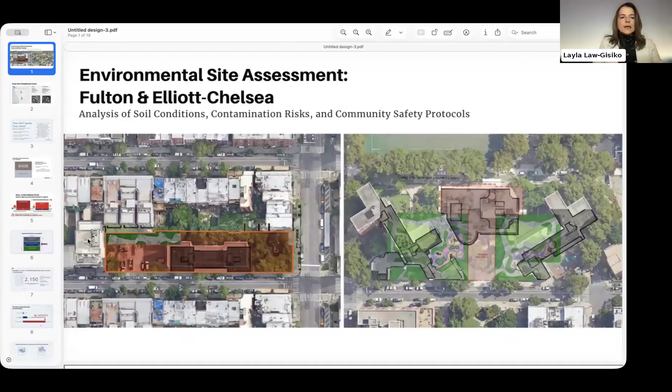Okay. So just to situate the audience, for Fulton, the first building that is slated for demolition is located on 19th Street at the corner of 9th Avenue, while for the Elliott-Chelsea campus, the Chelsea Addition building is the first building slated for demolition, and it is on West 27th Street between 9th Avenue and 10th Avenue.

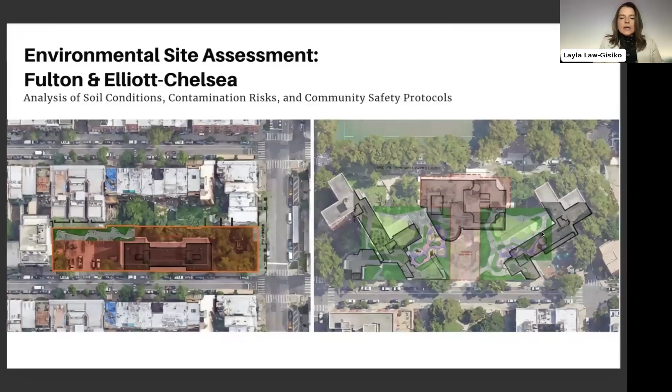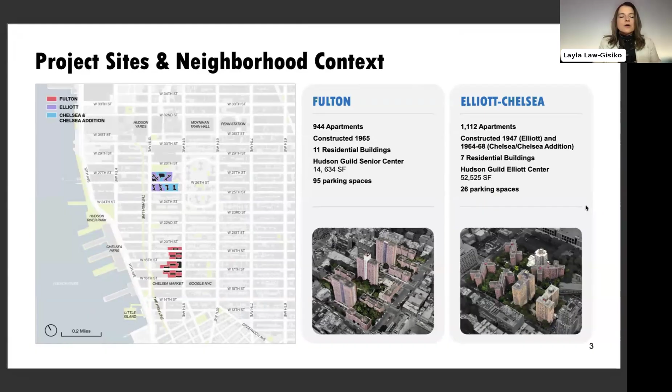You can see on the map the full campuses going from 16th Street to 19th Street and bounded by 9th Avenue for Fulton, and from 25th to 27th Street from 9th to 10th Avenue for Elliott-Chelsea. Under the plan as it is proposed, it would see the demolition of all 24 buildings, 18 residential buildings, and it would see the reconstruction of much larger structures.

So the soil quality was basically assessed, and the developer, in conjunction with NYCHA, didn't guess, they tested. This was part of the requirement for the environmental study that needs to be performed in order for this project to receive all the approvals. What it did is a geophysical survey and direct push soil borings, which means that they basically inserted with pressure some canisters inside the soil and captured samples.

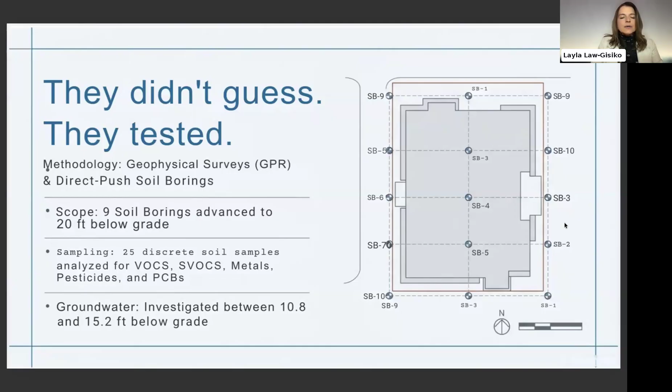There were nine soil borings, and they advanced to 20 feet below grade. The sampling was then analyzed for a number of contaminants, including heavy metals and vapors. The groundwater was also investigated between 10.8 and 15.2 feet below grade.

So what they found is that the immediate subsurface between 0 and 12 feet is actually non-native fill, also known as urban land. It is basically a composite of sand, silt, gravel, brick, and ash. This comes from the time when the existing buildings were constructed, and they basically took any material that they came across, and we'll see that there was a lot of stuff there, including existing buildings, but also gas stations and factories. All this material was basically crushed, and it is on that material that they built the existing buildings. Below 12 feet, you hit the native soil and the bedrock.

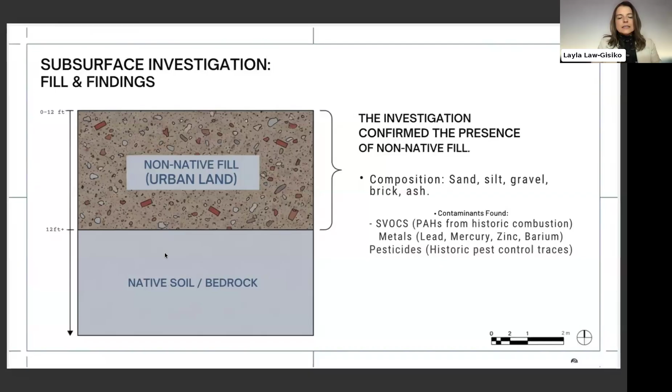What the report found is that there is soil contamination, heavy metals that exceed the safety limit, specifically for lead. At Elliott-Chelsea, it reaches 2,680 milligrams, where the limit should be 400. And at Fulton, it reaches 2,180, same limit. Additionally, toxic metals at Elliott-Chelsea in exceedance of what is deemed acceptable include cadmium, copper, and manganese. And barium and mercury also exceed the safety thresholds.

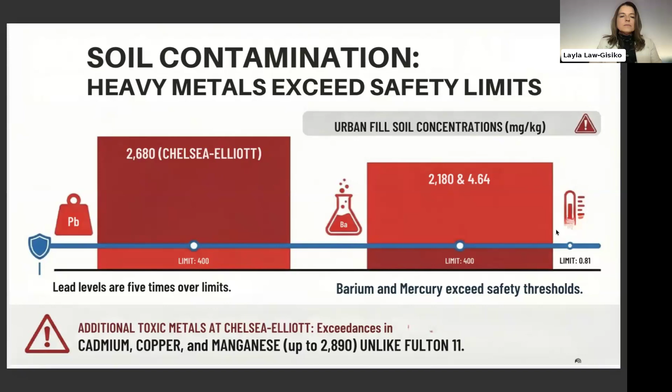How does acceptable get defined? Under DEC definition, DEC stands for the Department of Environmental Conservation, and it is a state agency. Basically, there are three tiers. The first one, known as unrestricted, is the most strict standard. It means that it is safe for any type of activity, housing, school, hospital, but also for farming, where obviously you want to make sure that you're farming in an environment that is safe so that all this contamination doesn't get transferred into the food.

Then tier 2 is the restricted residential threshold, and this is deemed an acceptable standard to develop housing. So it has contamination, but it is contained, and it is considered safe for housing construction. And then tier 3, where you can have commercial or industrial use, and it is basically not safe for a residential or recreational use, such as a playground or a school.

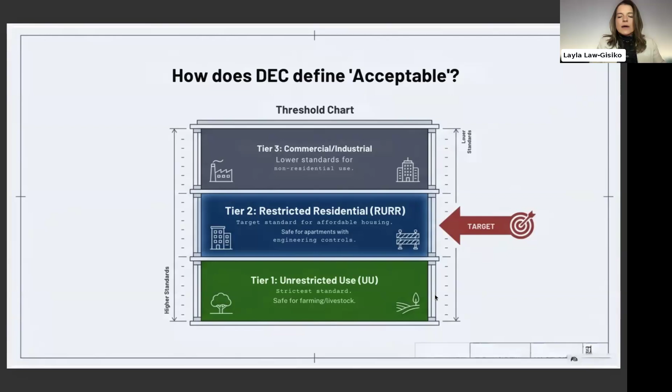So, spotlight on lead, which is the main contaminant that is reported in this report. The maximum detection is 2,150 milligrams per kilogram of material. Lead is a heavy metal historically used in gasoline, paint, and plumbing. Within the site context, it was found in 14 out of the 25 samples within the fill layer. So it's directly underneath the level of the ground.

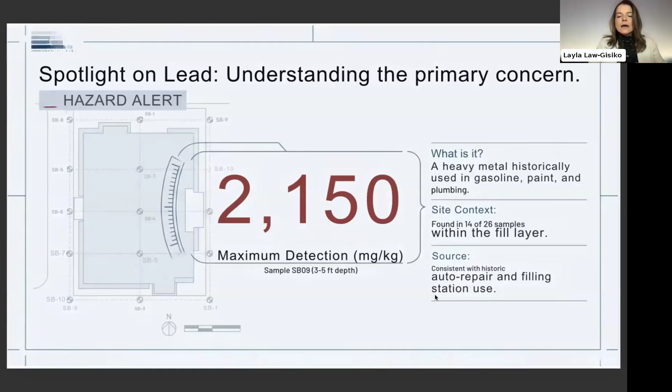And the source is consistent with the historic use of the sites, where there were auto repairs and filling gas stations. So the data confirms that there's need for remediation. Once again, a little diagram. In green is your unrestricted limit. In blue is your residential limit, that is restricted. So it's a little bit polluted, but it's considered safe. And then in red, this is the current condition.

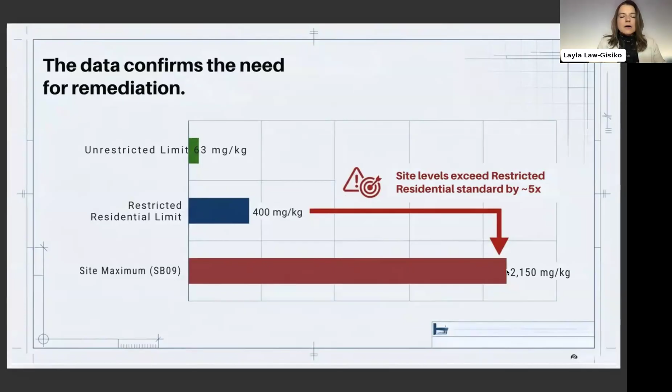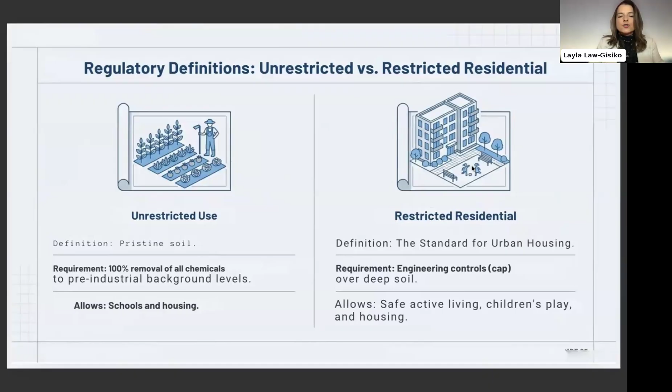Regulatory definitions, we went through that already. So unrestricted use, you can do a lot of stuff, including schools, housing, and farming. Restricted use, you can do recreational and housing. And then, as we saw in the other slide, the third tier would be industrial and considered not safe for housing. So the concern with this contamination is exposure to the contaminated agents.

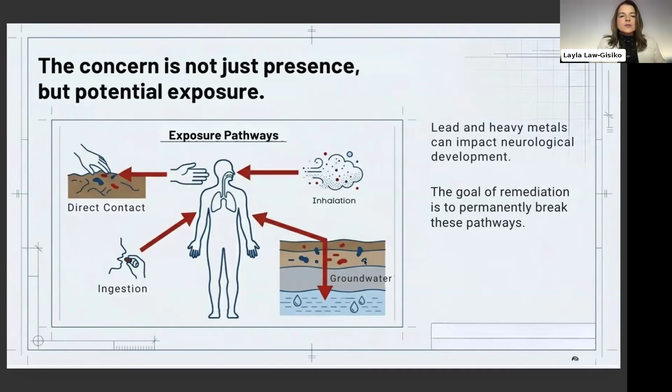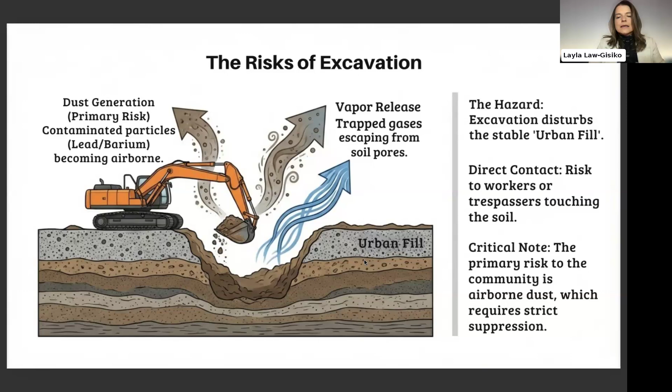It can be by direct contact, by inhalation, by ingestion, or because it is in the groundwater. So the remediation needs to address all these potential exposures. The risk really comes from the excavation. If you leave it untouched, these agents basically don't travel, they don't become airborne. But as soon as you excavate, then there's dust generation, contaminated particles of lead, barium, copper, mercury, as we just saw. And it also releases vapors, trapped gases that escape from the soil.

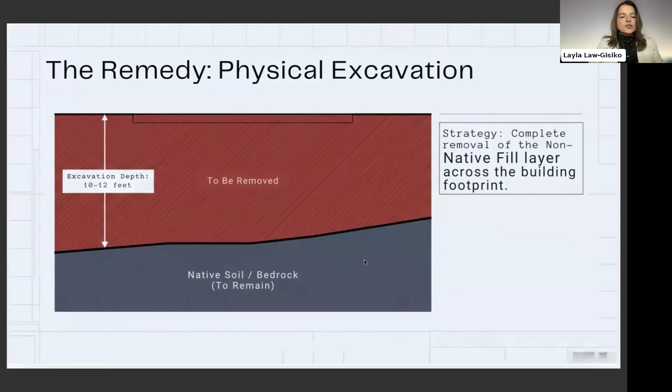As we saw, the area that is contaminated is the area that needs to be excavated. In order to build these buildings, because they will have basements, the excavation needs to reach 10 to 12 feet, which is where the contamination is located. So we went through that already. The historical context and the source of the contamination: the urban fill layer at both sites is underlain by a layer of non-native fill, debris, ash, demolition materials. And as we saw, they range from 1 to 14 feet deep, and there are legacy materials that contain metals.

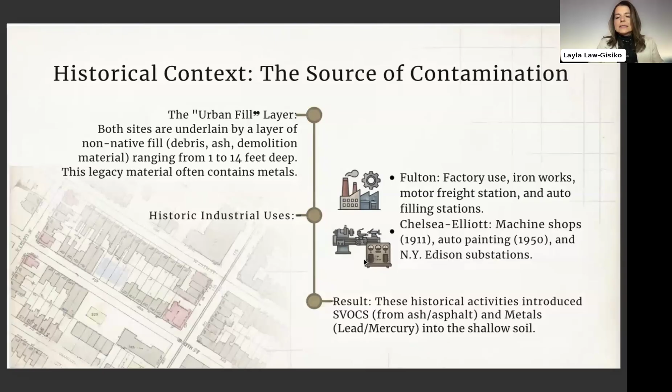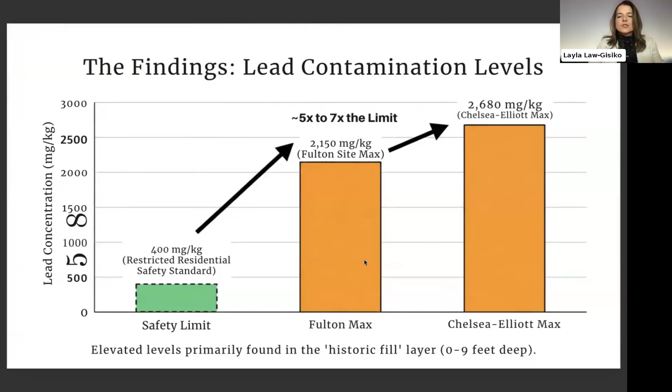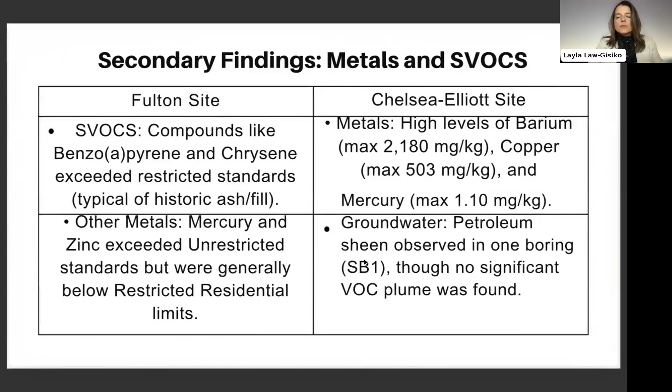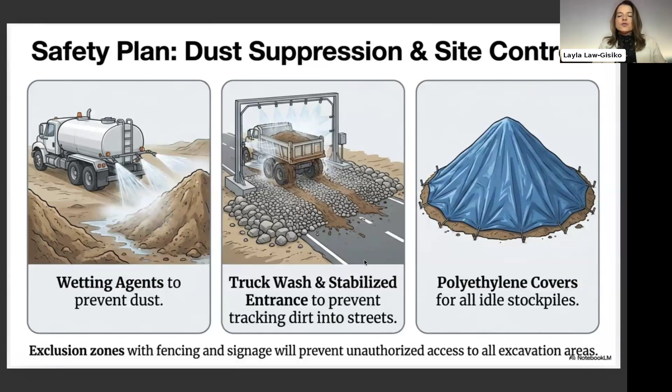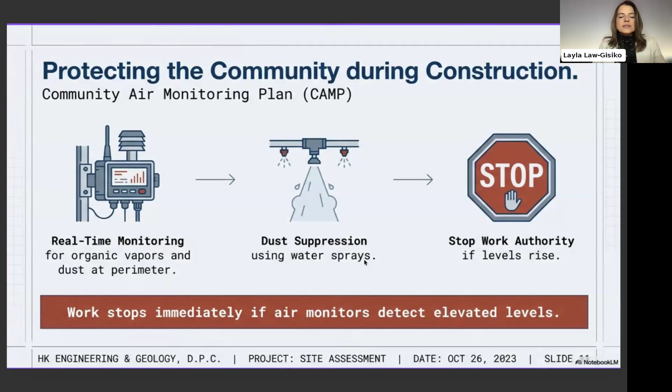In order to protect the community, what is typically done is a community air monitoring plan. The acronym is CAMP. So there's real-time monitoring for organic vapors and dust at the perimeter. There's dust suppression using water sprays, and then a stop work authority if levels rise. And typically, in these types of construction environments, the work stops immediately if air monitors detect elevated levels.

Finally, you should all know that we are within the public comment period and all of you can participate. The deadline to submit comments has been extended. Initially, it was going to be January 24. We were able to raise the concern with the Department of Environmental Conservation. They have agreed to push back the deadline, and it is now February 23rd, 2026. You can submit your written comments to the email address that is on your screen, mandy.yaw@dec.ny.gov.

The hard copy of the documents is available at the Muhlenberg Library, located at 209 West 23rd Street, as well as at the Manhattan Community Board 4 District Office, located at 424 West 33rd Street. But easier yet is to access those documents online for those who have a computer and an internet connection. And the URL is on your screen.

All this information will be posted. I'll make sure that it becomes available so it's easily accessible. Up until now, it hasn't been very easy to find, but we're working with DEC and others to make sure that the public can easily access this information. So that's it for my presentation. I'm going to stop sharing my screen.